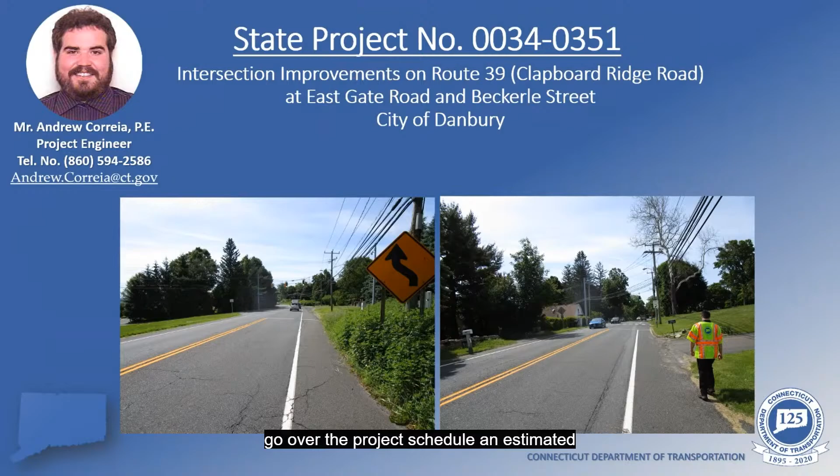Continuing on, we have a zoomed-in aerial of the approximate project location. To orient yourself in the slide, north is the top, south is the bottom, and west and east are left and right respectively.

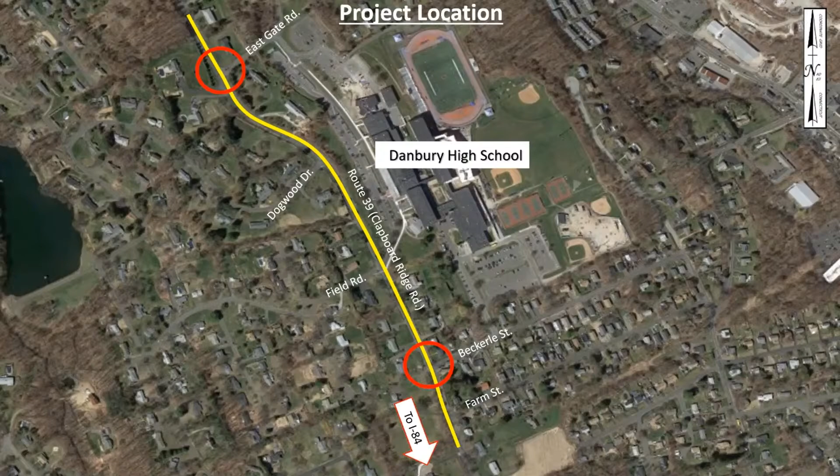The project itself is highlighted by the yellow line running down Route 39, with both of the intersections we're proposing improvements for highlighted in red circles: East Gate Road to the north and Beckerle Street to the south.

The total project length is about 3,700 feet, starting a little north of East Gate Road and continuing further south beyond Beckerle Street and even further south beyond Farm Street.

Route 39 is classified as a minor urban arterial, which means the road can accommodate local bus routes, lower speeds, and shorter trips for vehicles, lower vehicle volume, and provide access to residential areas that larger roadways in the area cannot. The posted speed limit for Route 39 is 35 miles an hour.

The project itself is located adjacent to Danbury High School, with both East Gate Road and Beckerle Street providing main access points to the northern and southern parking lots for the high school.

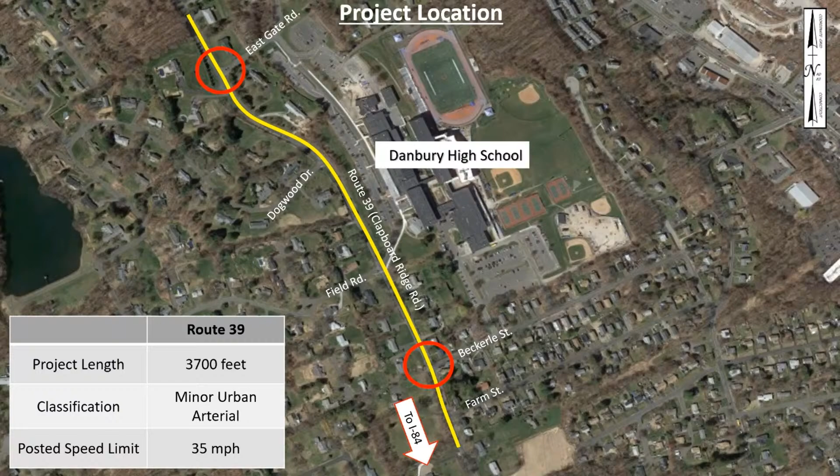Next, in these next few slides, I'll be showing a few pictures of existing conditions and going over what they can tell us about the intersections themselves.

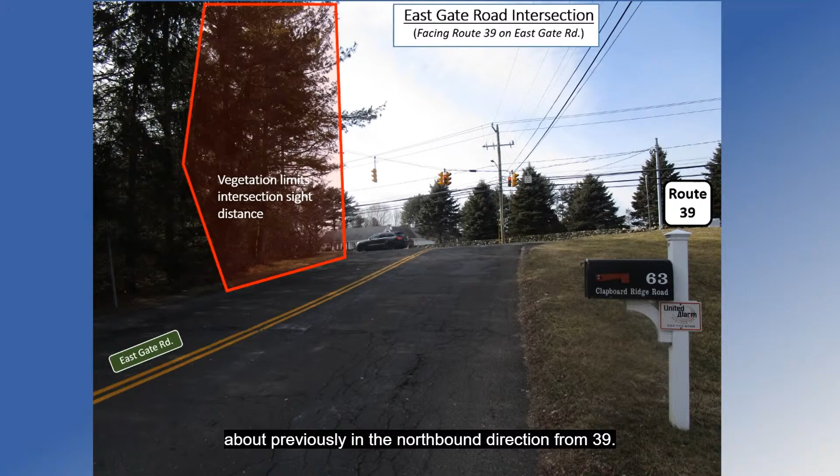Continuing on to another view of the intersection, we are now on East Gate Road looking up towards Route 39. As you can see towards the left hand of the intersection highlighted by the red shape, these are the trees I was talking about previously in the northbound direction of Route 39. As it is now, these trees inhibit the driver's ability, once coming up to the intersection, to look down Route 39 to make a safe right turn.

This is what we call a limit on the intersection sight distance, hence why there is a no turn on red for this intersection, as the driver must come to a full stop and travel on Route 39 must stop before they can safely turn right.

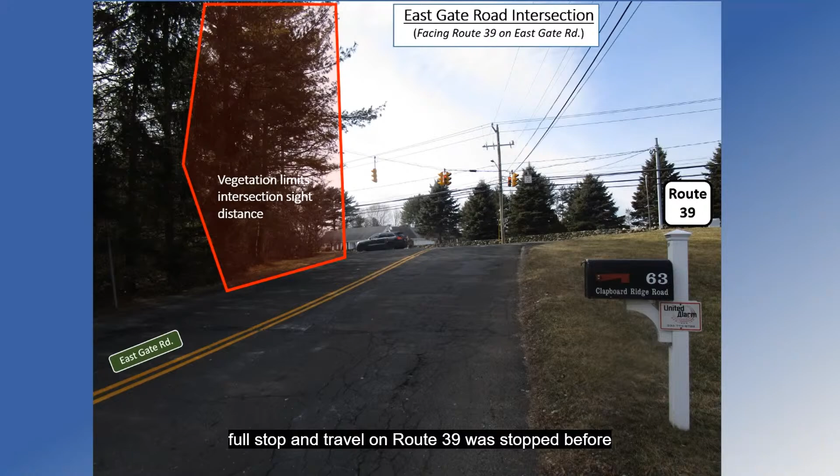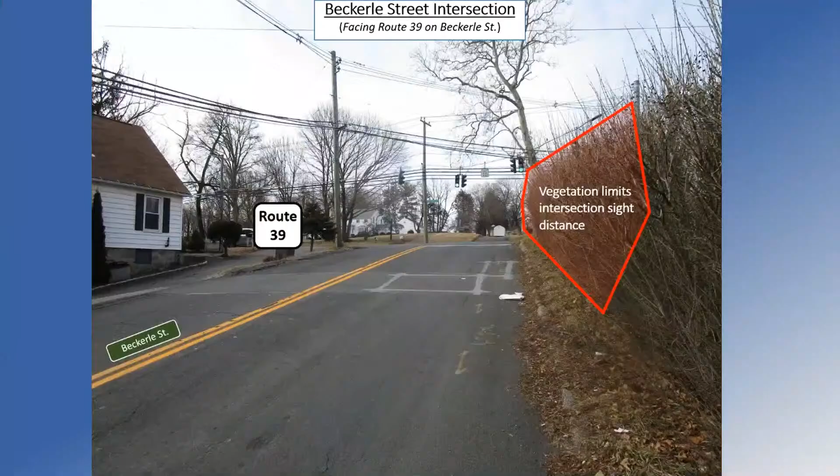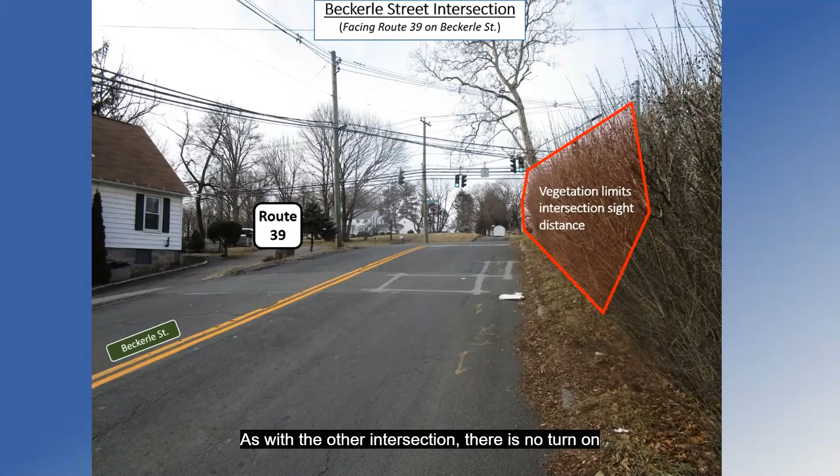Continuing on for this intersection, we are now on Beckerle Street, looking up towards Route 39. As with the other intersection, we have vegetation that limits the driver's ability to look up and down Route 39, as well as adjacent residential properties that make this roadway narrow. As with the other intersection, there is a no turn on red sign for this due to the narrowness of Route 39 and the limits placed on the driver to safely look before turning.

Moving on from the existing conditions on the intersections, I'm going to be explaining the project purpose and need, and also discussing the original project initiation.

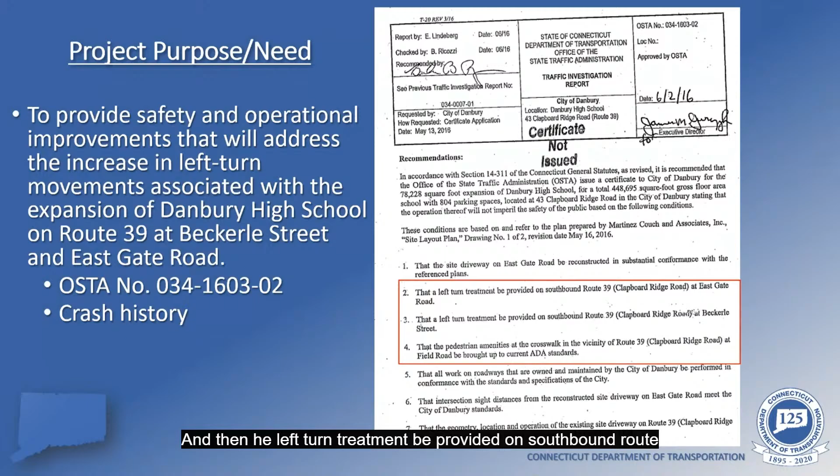Those are highlighted in red now, and they are that a left turn treatment be provided on southbound Route 39 at East Gate Road, and that a left turn treatment be provided on southbound Route 39 at Beckerle Street, and that the pedestrian amenities at the crosswalk in the vicinity of Route 39 at Field Road be brought up to current ADA standards. So this was originally why the project was initiated.

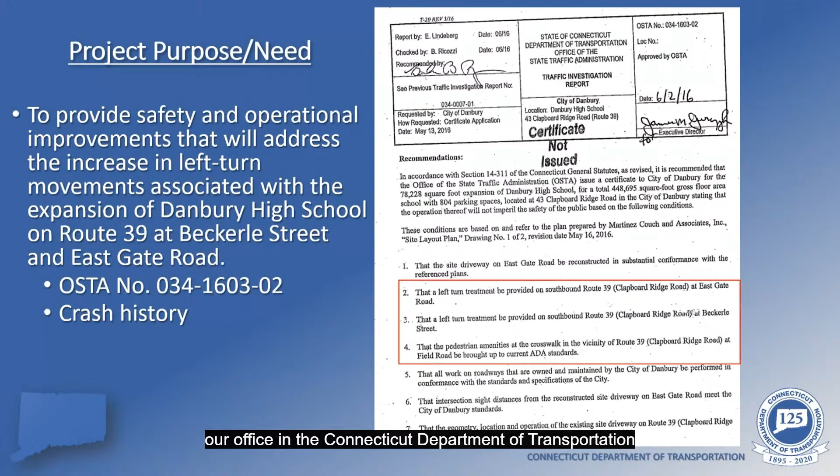Now, from there, when it came to our office in the Connecticut Department of Transportation, we looked into it a little more. Beyond this, we looked at crash history, we looked at existing conditions, as you saw in the pictures before. So we finally came upon this project purpose, which is not only to fulfill the conditions in this traffic investigation report, but was also to provide safety and operational improvements that will address the increase in left turn movements associated with the expansion of Danbury High School on Route 39 at Beckerle Street and East Gate Road.

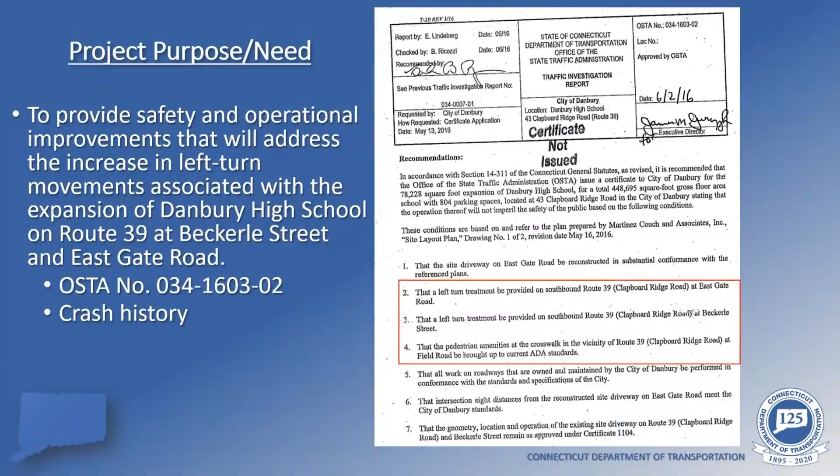As I mentioned in the previous slide, we analyzed crash histories while investigating project purpose and need. To do this, we create crash diagrams over time frames by utilizing police reports for a given area.

What you see in front of you is the crash diagram for Route 39 and East Gate Road for the time frame of January 2015 to December 2019.

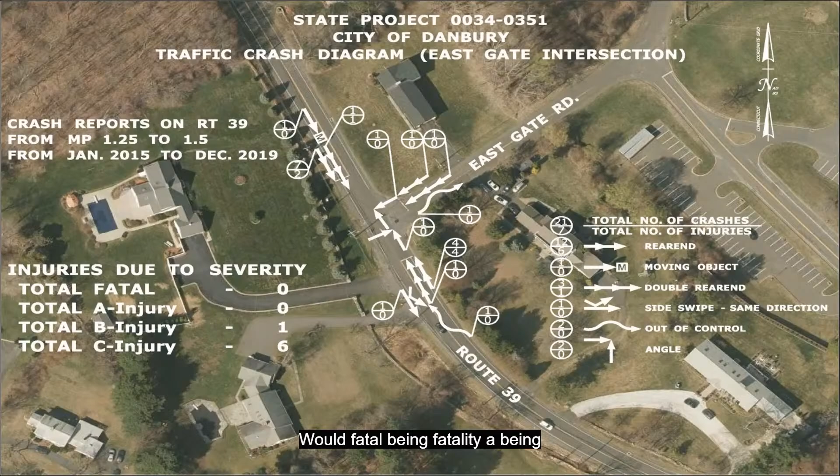North is the top of the slide, south is the bottom, and west and east are left and right respectively. On the left side, you'll see injuries by severity, a breakdown given the time frame, with fatal being a fatality, A being a major injury, B being a minor injury, and C being cuts and bruises. On the right hand side, you can see a breakdown of the total number of crashes based on the type of crash, and the breakdown of total number of injuries based on the type of crash.

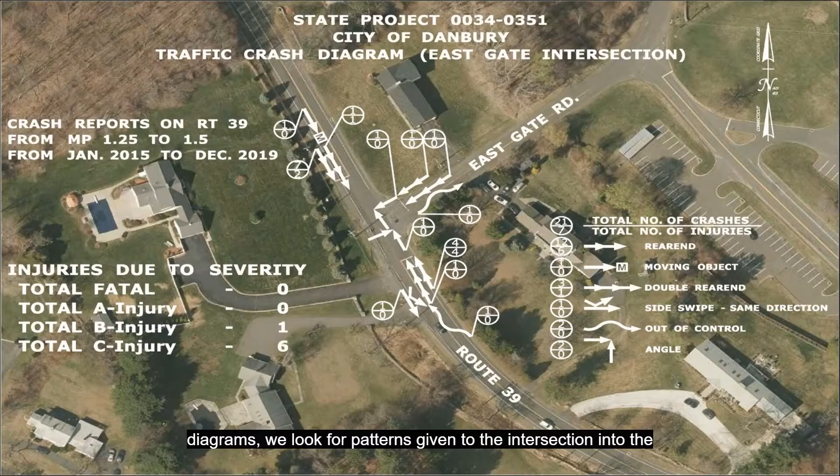Now for this intersection, there was a total of 21 crashes and 7 injuries over the time frame. While analyzing these crash diagrams, we look for patterns given to the intersection and the roadway to see what we need to do to improve.

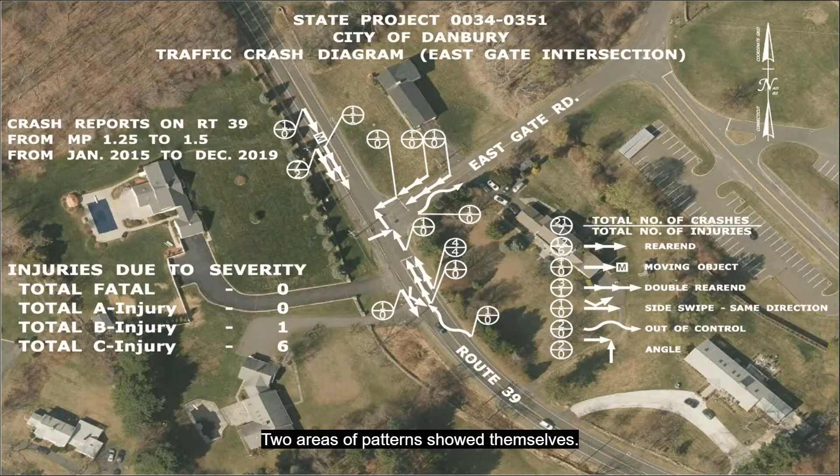For this intersection, two areas of patterns showed themselves, now highlighted by the yellow circles. The larger yellow circle is southbound travel coming into the intersection. Rear ends and multiple rear ends seen here are most likely due to a timing issue with the left turns and bypassing traffic coming through. On the northbound direction in the smaller circle, these rear ends and multiple rear ends kind of skewed themselves and were a little too much for what was given of the volumes coming in and out of the intersection.

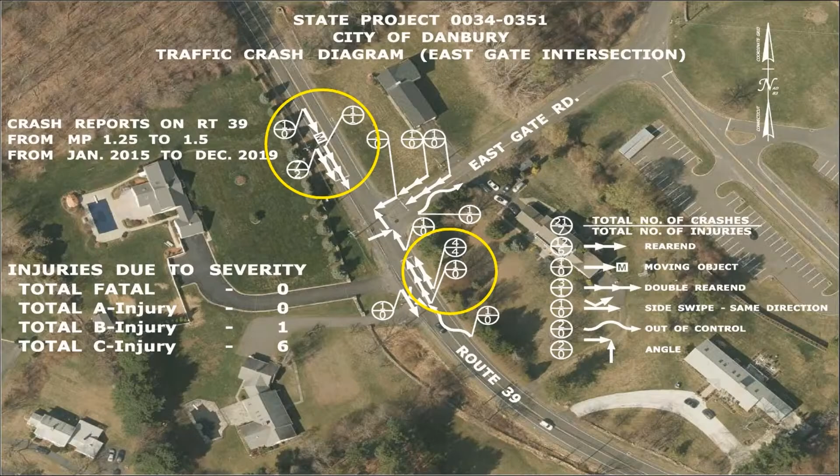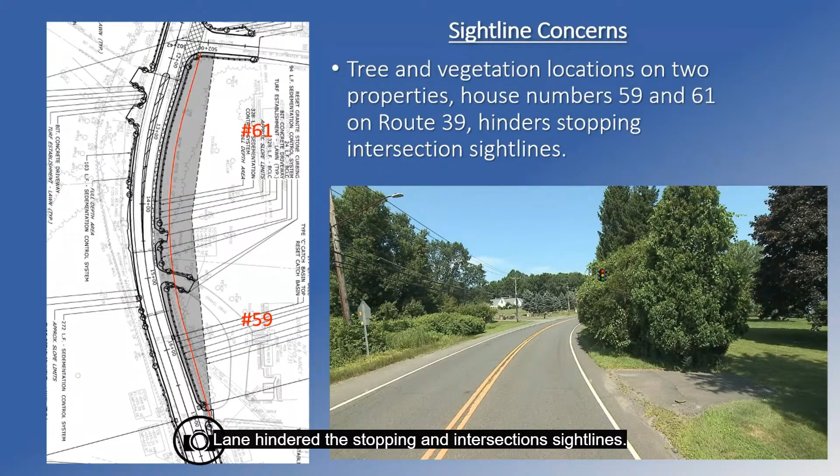Seeing this odd pattern of crashes in the northbound direction caused for further investigation. Once out in the field and examining existing conditions, we were able to conclude that tree and vegetation immediately adjacent to the northbound travel lane hindered the stopping and intersection sightlines. As you can see highlighted in red in the bottom picture, this vegetation hinders a driver's ability to see the upcoming traffic signal.

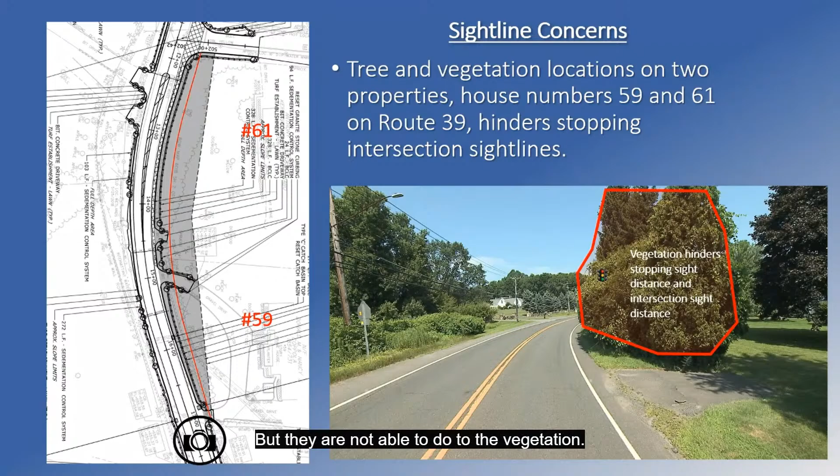Looking at the left-hand picture, the camera is where this photo was taken from. The driver should be able to see the signal, but they're not able to due to the vegetation.

To show what I mean by a driver's perspective coming into the intersection being hindered by the trees and vegetation, there's a short video clip in this slide. This is a car driving at the posted speed limit coming up to the intersection.

Now, as the driver is coming up to the intersection, the driver's perspective does not expect a traffic signal to come out so quick from the inside of the curve. I'll show the video again to exemplify this.

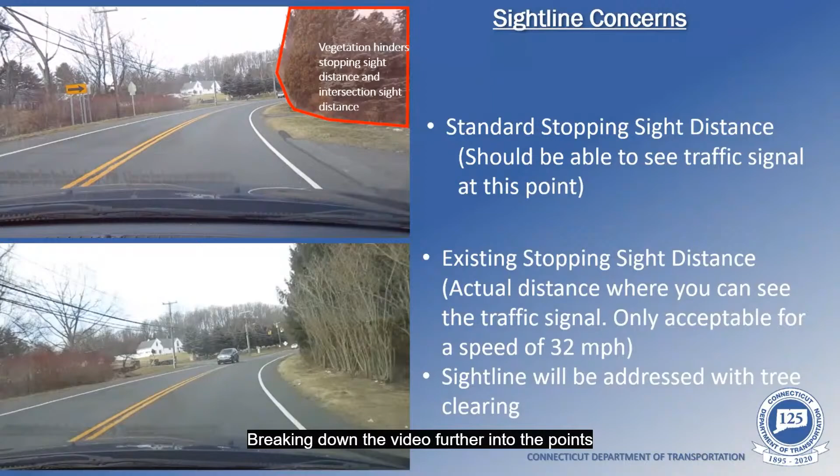Breaking down the video further into the points of where stopping sight distance is needed, the top picture shows the position of a car where the standard stopping sight distance should be. As you can see, as a driver, you cannot see the traffic signal head due to the vegetation highlighted in red. On the bottom picture, it shows the actual point when a driver can see the signal head. This is actually only good for a speed of 32 miles an hour.

We will be addressing this with proposed tree clearing to alleviate the issue.

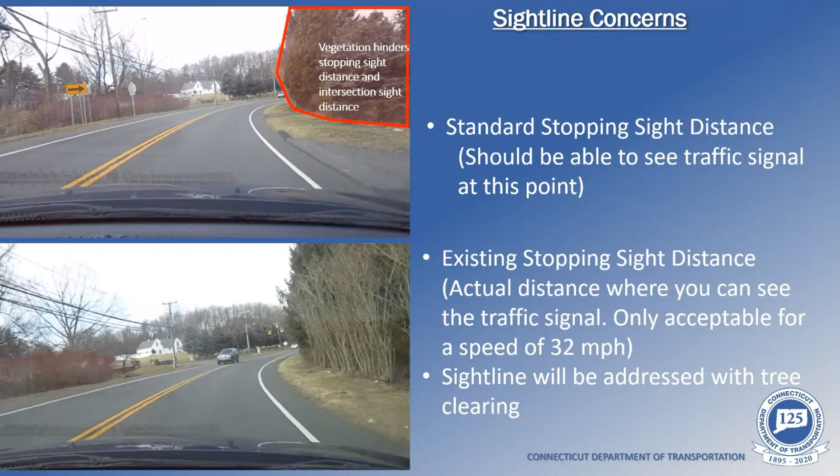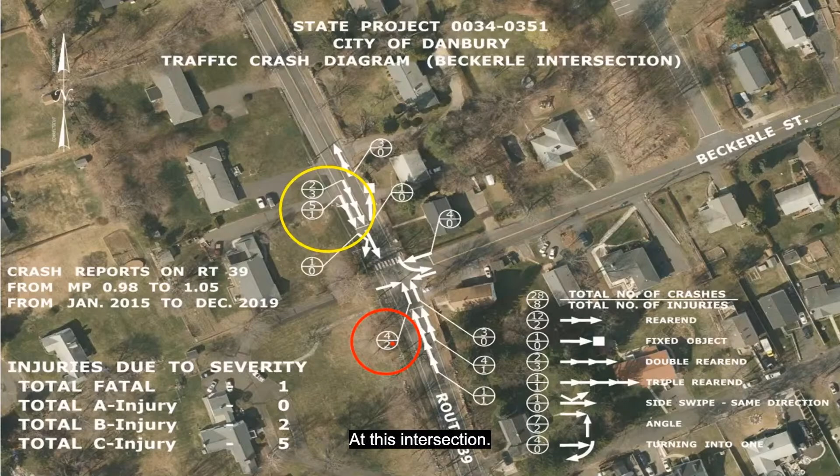One large difference between the two intersections was there was a fatality at this intersection. This fatality was due to, as you can see in this diagram provided by the police report, a left turn vehicle, vehicle 2, turning left onto Beckerle Street, having a collision with vehicle 1 traveling in the northbound direction on Route 39.

Now, we propose some safety improvements for both of these intersections, and I'll be handing off the presentation to Richard Franklin, who will go over what we plan to accomplish.

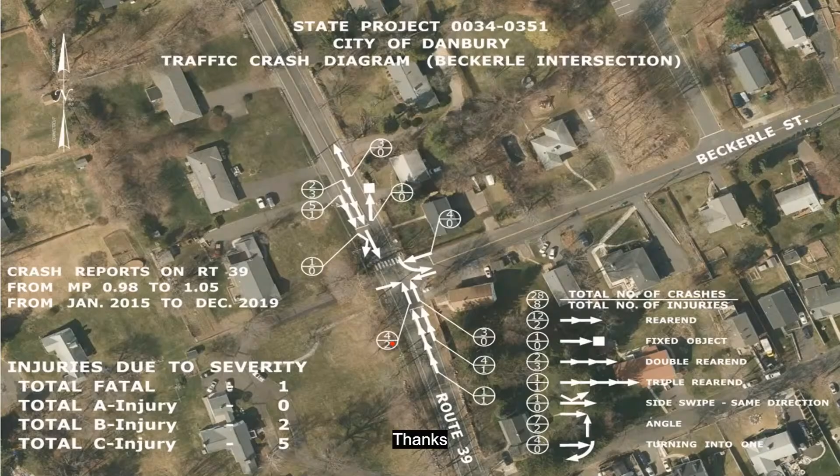I'd like to reiterate that our design is at the 30% design phase, meaning we are 30% of the way towards final design. Due to this, the project design is subject to change between now and final design.

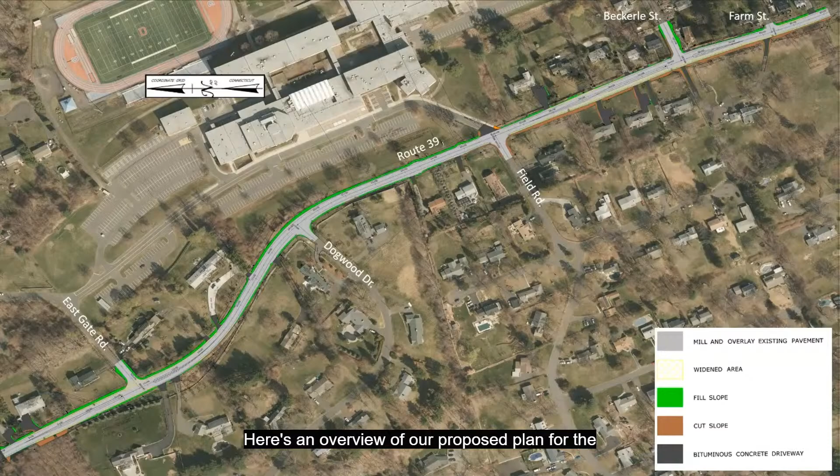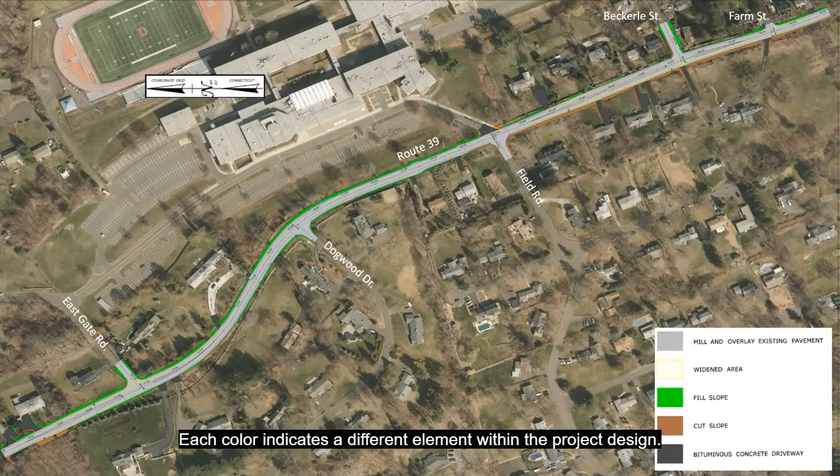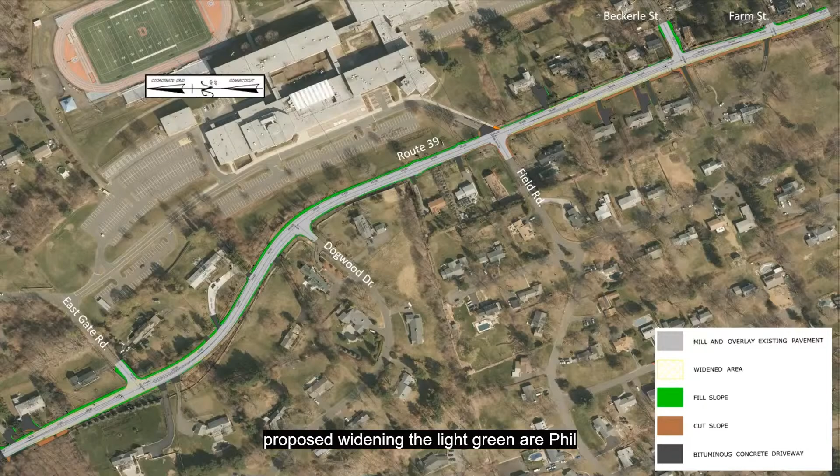Here's an overview of our proposed plan for the project. We'll take a closer look at each section a little later. This is what we call a color plan. Each color indicates a different element within the project design. The light gray is the roadway, the yellow hatch is proposed widening, the light green are fill slopes, the brown are cut slopes, and the dark gray are driveways.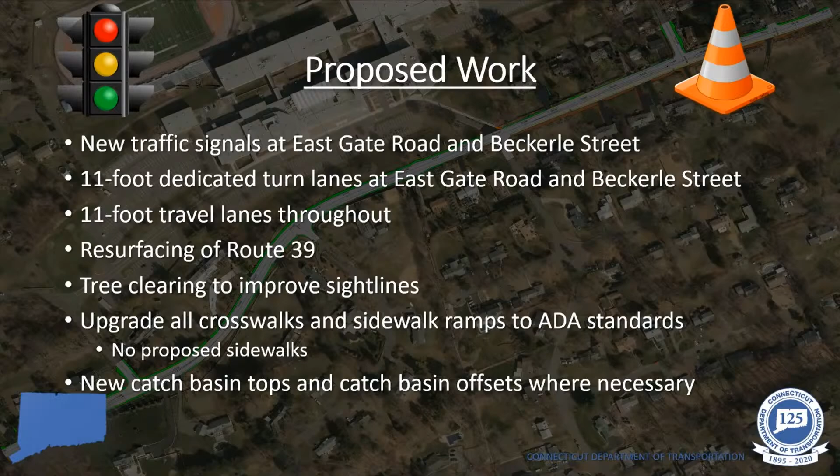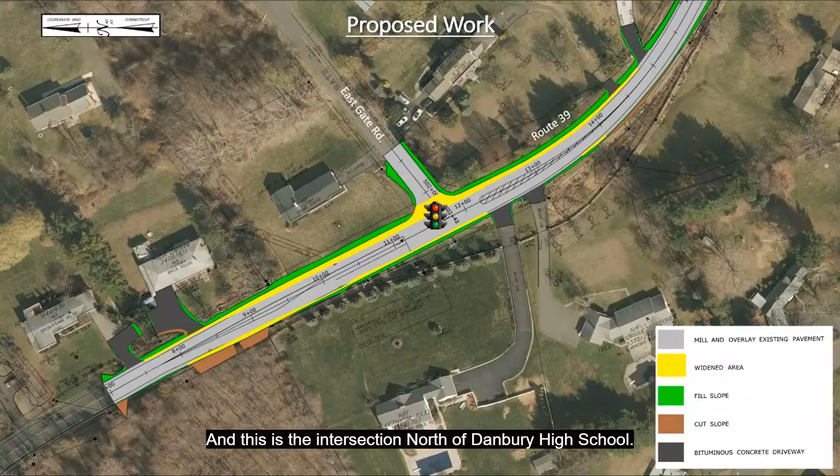Here we have our color plan once again, this time focused on the East Gate Road intersection portion of the project, north of Danbury High School. The main change we're proposing is the introduction of a dedicated left turn lane. We're also proposing new traffic signals to bring this intersection up to date and accommodate our new intersection layout. Along with the traffic signal, new pedestrian amenities are being proposed that meet Americans with Disabilities Act standards, which I'll refer to as ADA for short.

Notice the yellow shaded region. This is where we're proposing widening and full-depth roadway reconstruction to fit the new turn lane. There will be about 4 to 5 feet of widening on the northbound side and about a foot of widening on the southbound side. There's less widening proposed on the southbound side to avoid impacting a large stone wall. There will also be some driveway reconstruction in the area to bring these driveways up to state standards.

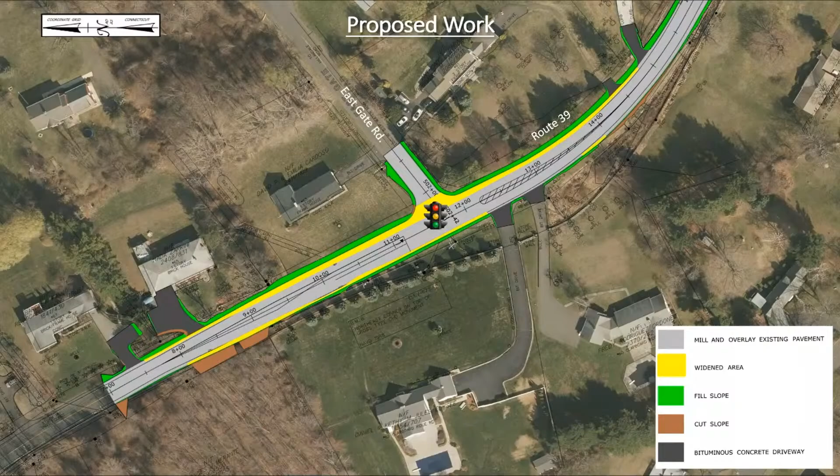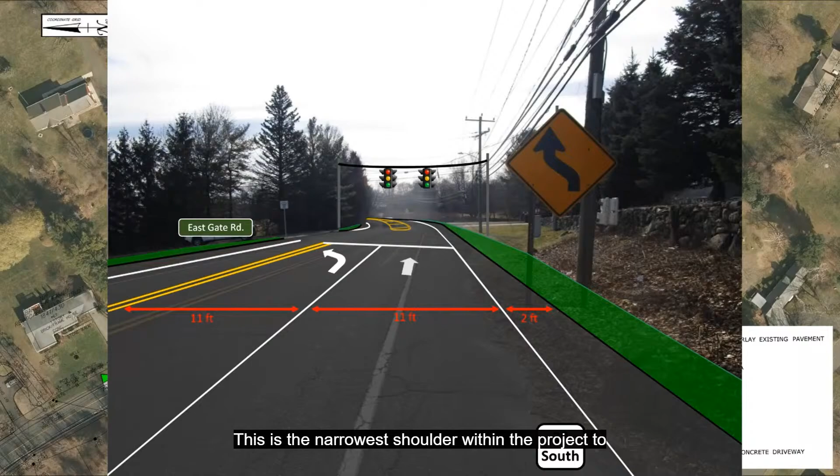Here's a rendering of what the intersection might look like when construction is completed. Notice the 11-foot turn lane and travel lane with a 2-foot shoulder. This is the narrowest shoulder within the project, to avoid impacting that wall to the right which I mentioned previously. The standard shoulder width within the project is at least 4 feet.

It's important to add that these left turn lanes improve the safety of the intersection by giving users a protected left turn phase. This is intended to avoid possible crash scenarios like the one Andrew Correa previously presented about, which resulted in a fatal injury. Andrew also showed evidence of drivers traveling off the right side of the roadway to pass vehicles waiting to turn left. Having a dedicated turn lane and travel lane will mitigate that issue as well.

Now we'll take a closer look at the Beckerle Street intersection portion of this project. It's very similar in design to the East Gate Road intersection and introduces a new dedicated left turn lane. Again, we're proposing new traffic signals and pedestrian amenities. At this intersection, the majority of the widening is being proposed on the southbound side. This is due to limited state-owned property on the northbound side, and there are several stone walls adjacent to the roadway which we want to avoid impacting.

The widening on the southbound side ranges from about 5 to 7 feet. At this intersection, you can see there's a significant brown shaded region on the southbound side, which is a cut slope. This is when we'll be cutting into the slope to provide smooth grading on the properties being affected by the roadway widening. Note that the cut slopes are indicated in brown, but all properties affected by this project will be receiving new grass.

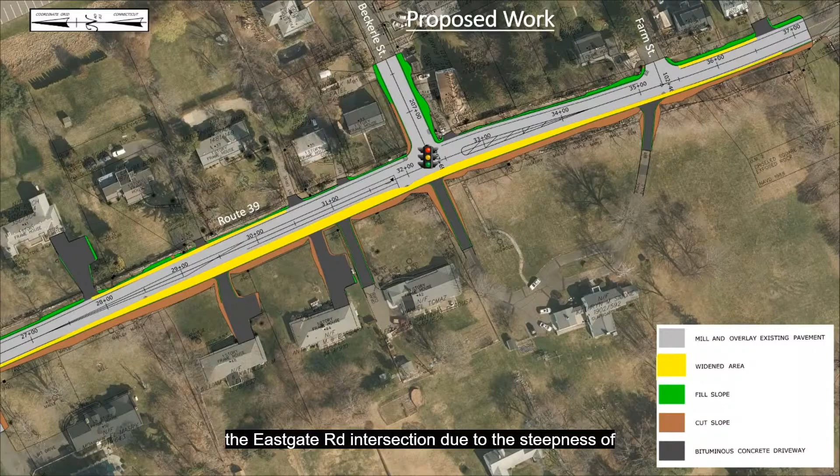The properties adjacent to the roadway here are steep, so we'll have to do a little more work to provide that smooth grading I mentioned. There will also be more driveway work in this area than at the East Gate Road intersection, due to the steepness of the driveways. This is because we want to provide driveways that do not exceed the maximum grade recommended by the state.

Here's a rendering of what the intersection might look like once completed. Notice the 11-foot turn lanes and travel lanes with the standard 4-foot shoulder. You can see the brown cut slope again, but as a reminder, grass will be provided on every property that is affected.

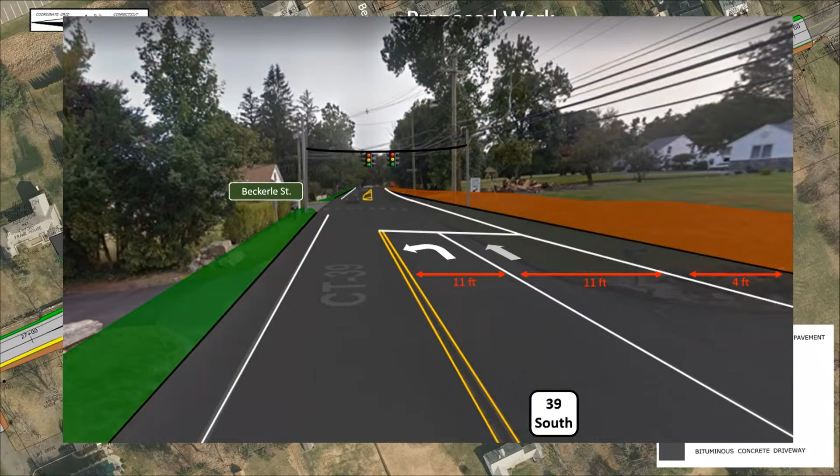As mentioned previously in this presentation, one of the requirements from the OSTA agreement with the City of Danbury was to upgrade the pedestrian amenities along Route 39 at Field Road to meet ADA standards. In these pictures, you can see the existing sidewalk ramp and crosswalk at the front of Danbury High School across from Field Road. Our proposed design replaces this ramp with an ADA compliant ramp like the one on the drawing in the lower right side of your screen. A new crosswalk will be put into place as well.

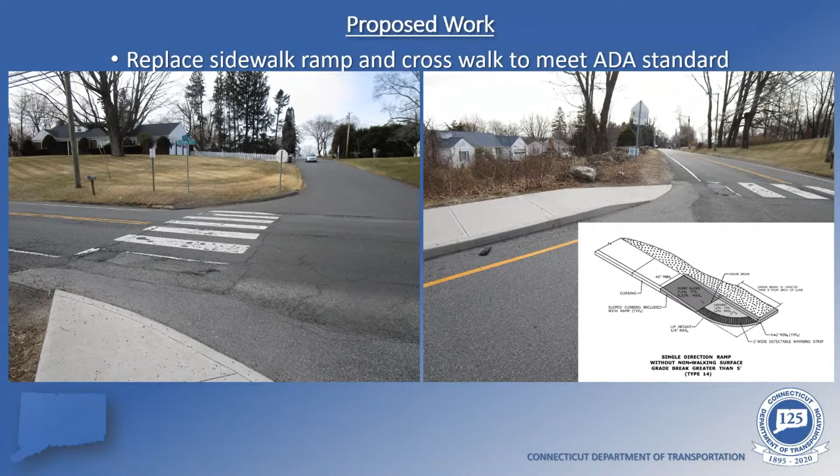And at this point, I would like to hand the presentation off to our rights-of-way coordinator, Jason Boyce, so he can explain a little bit about the rights-of-way process.

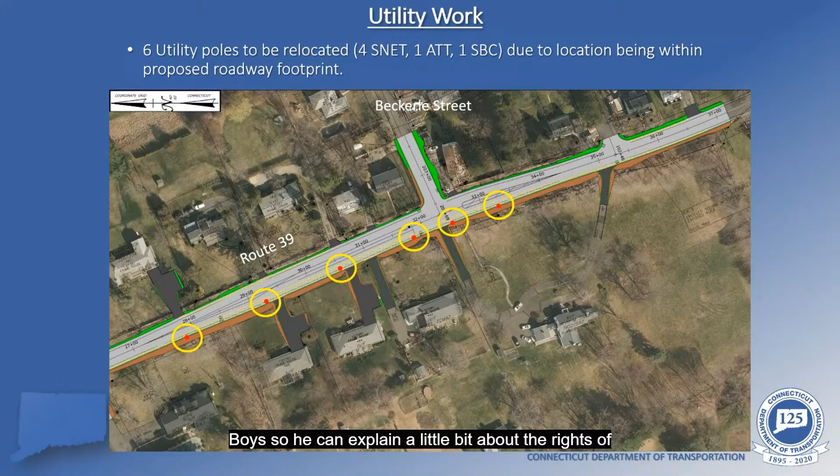Thanks, Rich. As Rich mentioned, my name is Jason Boice. I'm a project coordinator for the department's Division of Rights-of-Way. Rights-of-Way's purpose is to acquire all the property rights necessary for the project. All property rights will be acquired in accordance with Connecticut General Statutes Sections 13A73 and 13A98E and the Uniform Relocation Assistance and Real Properties Acquisition Act of 1970 as amended.

Anticipated property impacts on this project consist of sightline easements and slope easements. Now, of course, those are subject to change as the design progresses.

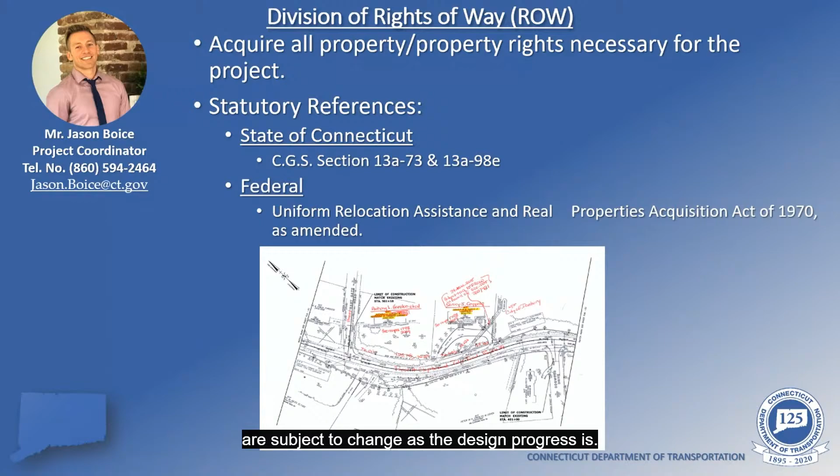So, the right-of-way acquisition process. First, each property owner will receive a letter of intent to acquire. This kicks off the right-of-way process and is often the property owner's first involvement with the right-of-way office. From there, valuation will occur. The department determines the fair market value of the impacts to the property to establish an offer of just compensation. Once valuation is complete, an offer letter will be drafted. The owner will receive a written offer letter from the department based on that valuation.

And that's when negotiations will occur. The owner is given a reasonable amount of time to consider the state's offer and enter into negotiations. At the completion of negotiations, an acquisition will occur. An acquisition can occur in one of two ways. One, an agreement can be reached and then an abbreviated real estate closing will occur. The state prepares all the documentation and pays all the recording costs associated with the closing. If negotiations reach an impasse, the Commissioner of Transportation has the authority to acquire property rights through eminent domain.

Now, eminent domain does not preclude the owner from continuing negotiations with the state. Owners are still entitled to the state's offer, the funds are deposited into the court, and the owner can petition for withdrawal at any time. Once funds are deposited into the court, they are out of control of the DOT, and depending on the encumbrances associated with the property, the withdrawal process can take some time. Now, the owner has 6 months from the date of condemnation to file an appeal with the court if continued negotiations cannot reach an agreement.

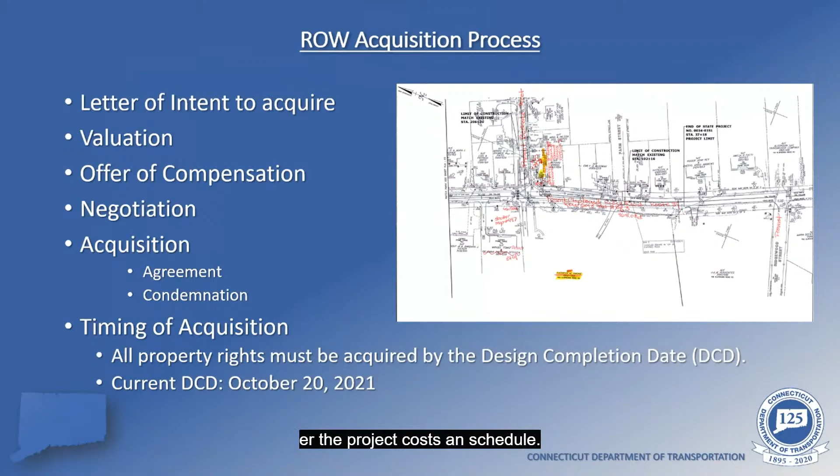Thanks, Jason. To finish off our formal presentation, I'm going to cover project cost and schedule. We are looking at a total construction cost of about $4.1 million, with 80% being covered by federal funds and 20% being covered by state funds. And we are looking to begin construction in the spring of 2022.

And with that, I would like to thank you all for listening to our presentation, and I'm going to hand it off to our project manager, Michael Chirpek, to begin the live question and answer portion of our public info meeting.

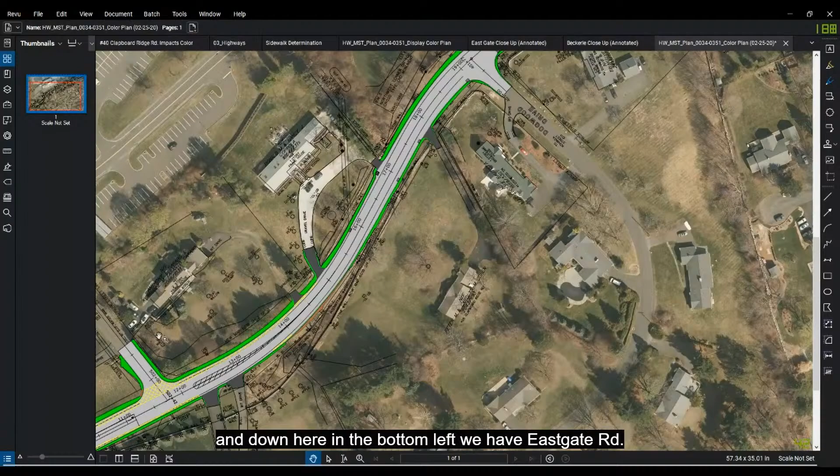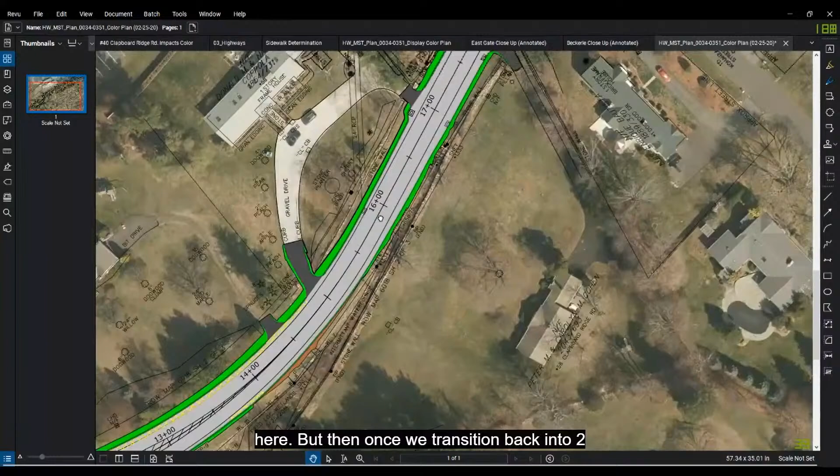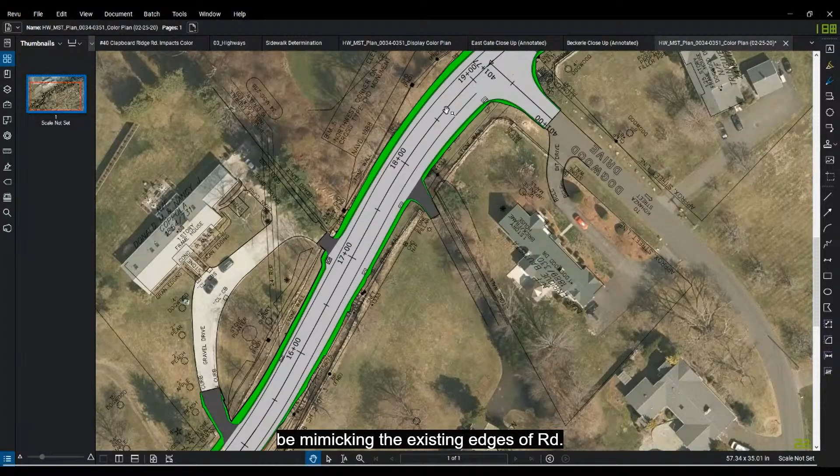Here at the top of the screen we have Dogwood Drive, and in the bottom left we have East Gate Road. As you can see by this yellow hashed area on the northbound and southbound sides, we have a little bit of widening up until these parts here. But once we transition back into two lanes along Route 39, we're looking to match existing conditions as much as possible, mimicking the existing edges of road, with maybe some slight grading on the southbound side. Beyond that, there's not much being proposed in this area.

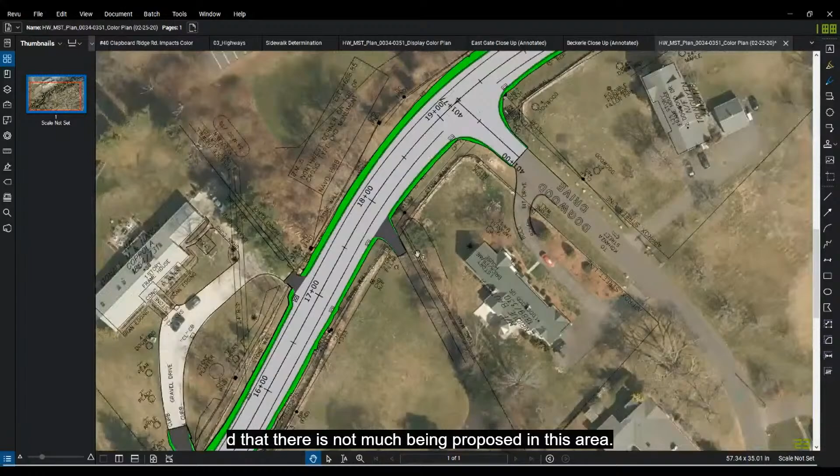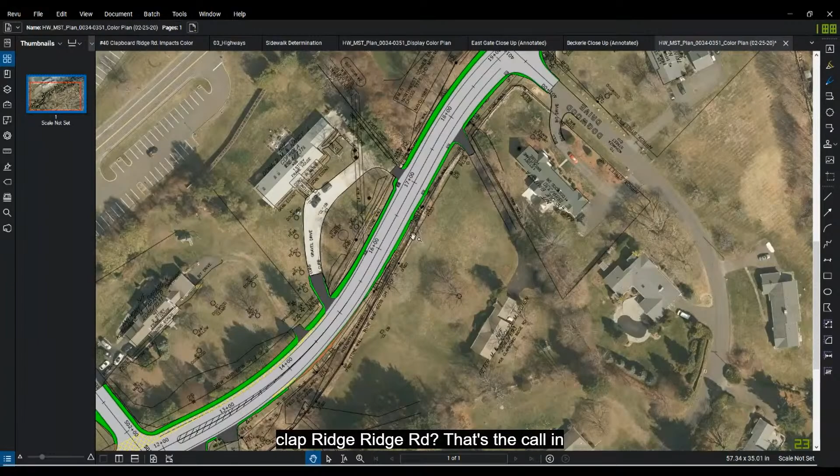Thanks, Rich. Rich, while you still have that up, would you mind going to 44 Clapboard Ridge Road? That's a call-in question. A resident at 44 Clapboard Ridge Road has septic in the front yard and wants to know how that's going to be handled. Sure, let me pull that up and see if I can provide a response.

So 44 is this house right here. To provide a response, from what I'm seeing here, and we can verify this with a cross section in the design plans, we do not expect to be doing any work on the private property except for regrading the existing driveway. The widening happening on the roadway has impacts to the front yard, albeit state right of way, so it would be unlikely that the septic is within the state right of way there. But we could verify that if it were a major concern, though I don't believe that it is.

But we are repaving and regrading the entire driveway, so we would probably pull an as-built showing where your septic system, the tank and leach field, is located - we could get that information from the town. If you know where it is, our guys could find it, but it doesn't look like it's going to be impacted. I still don't know exactly where it is, so it just doesn't look like it's going to be impacted, but we would verify that.

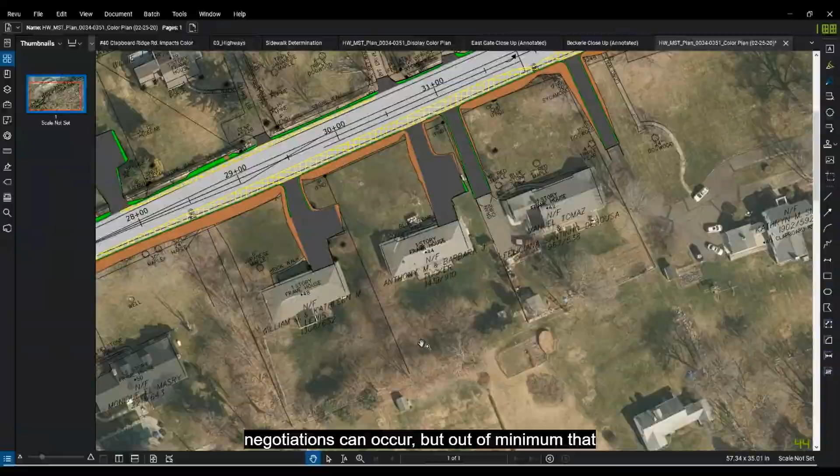Yeah, absolutely. So once a valuation occurs, it's considered a registered value, and that offer is made to the property owner. If they can't reach an agreement and the state does file for eminent domain, that valuation amount is deposited into the court and the property owner can withdraw it. Additional negotiations can occur, but at a minimum that valuation amount is deposited in the court for the property owner. If an agreement can't be reached, the property owner has 6 months to file an appeal, and at that point an argument can be made in front of the judge for additional compensation.

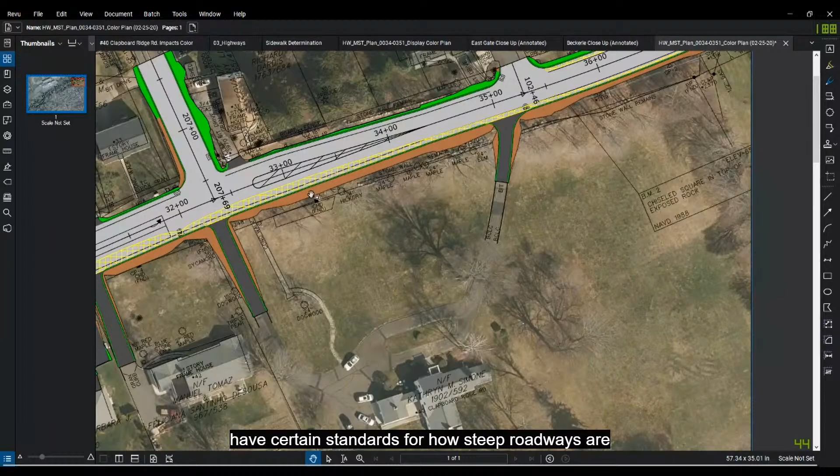Rich, would you go over some of the property impacts and the work we're proposing? Sure. As explained on our color plan, this yellow hatched region is where we are proposing our widening. This whole region currently is not roadway, but we will be expanding it to introduce this new turn lane. Because of this, we need to do some regrading in front of the property, indicated in the brown shaded region. All the regrading will have grass replaced; the brown just indicates cut slope. The grading is necessary because we have certain standards for how steep roadways or side slopes are allowed to be right off the roadway.

Following those standards leads to the extent of the grading here. Additionally, since we're widening, we'll need to do similar regrading on the driveways so they don't exceed state standards for how steep a driveway can be. But aside from the driveway work, all of the grading being done is within state right-of-way. That's pretty much the extent of what's going on here.

Hey Rich, can you zoom in just a little bit? Sure, what in particular? Zoom into the work being proposed along the edge of road. Yeah, we got a comment that it was hard to see. Okay, all right, sure.

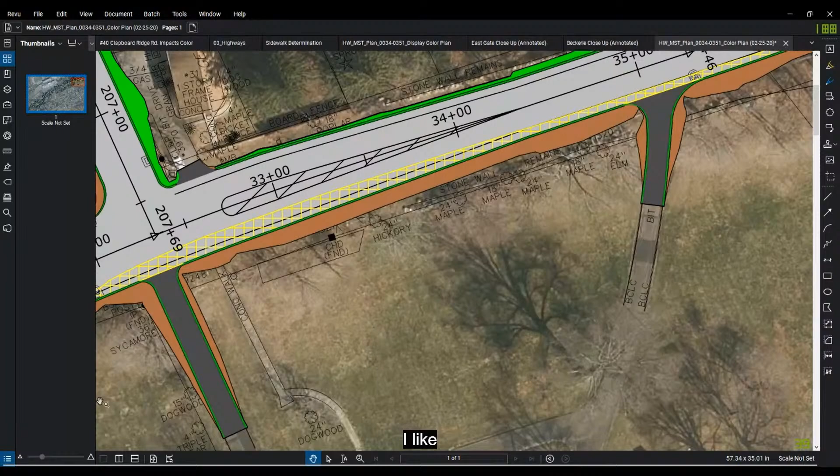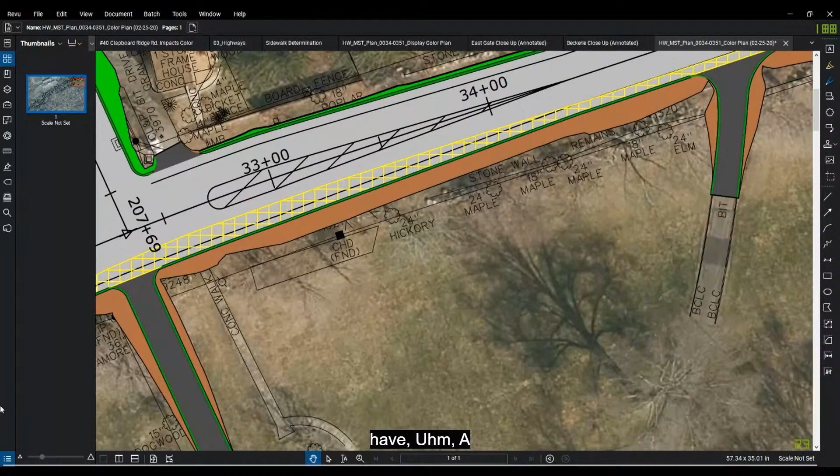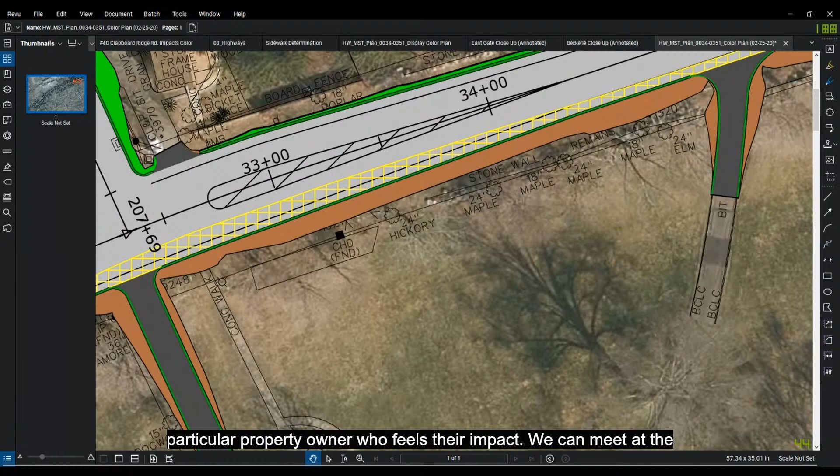As we mentioned earlier, we'd be happy to have a conversation after the meeting, tomorrow or the next day, about anything you see here—if there's anything concerning, if the video format wasn't good, if the sound quality wasn't good. This is one of the first meetings we've done in this format, so I appreciate everybody bearing with us. We like to be in a room and have that conversation with affected property owners to really explain the impacts. It's hard to tell in a plan view, we understand. So we could even meet outside with any property owner who feels impacted, meet at the property, and describe what's being done, maybe better in the field. We're willing to do that as well.

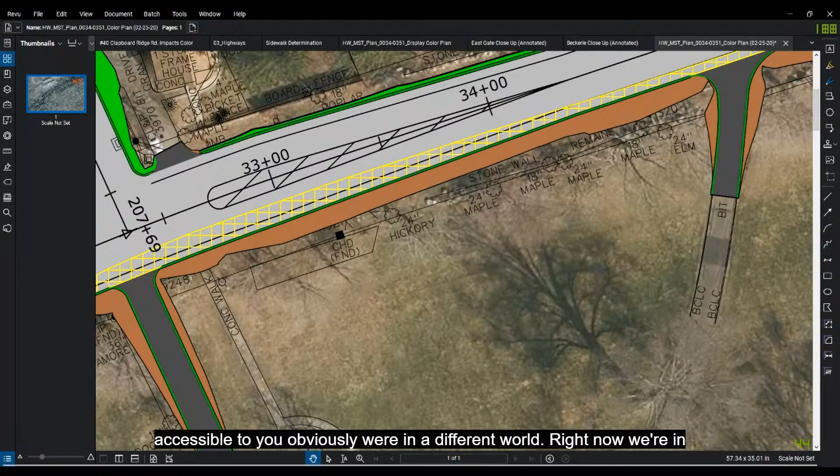We got a comment asking how to repeat access to the YouTube recording of the meeting. The same way you accessed the meeting tonight, through the project webpage, the YouTube link will be posted there after the meeting, as will a link to the demographic survey pertaining to tonight's meeting, how we did for outreach and to meet your needs. Typically we ask, was the building accessible to you? Obviously we're in a different, virtual world right now doing a virtual meeting, and we'd like feedback on that too. So it's the project webpage.

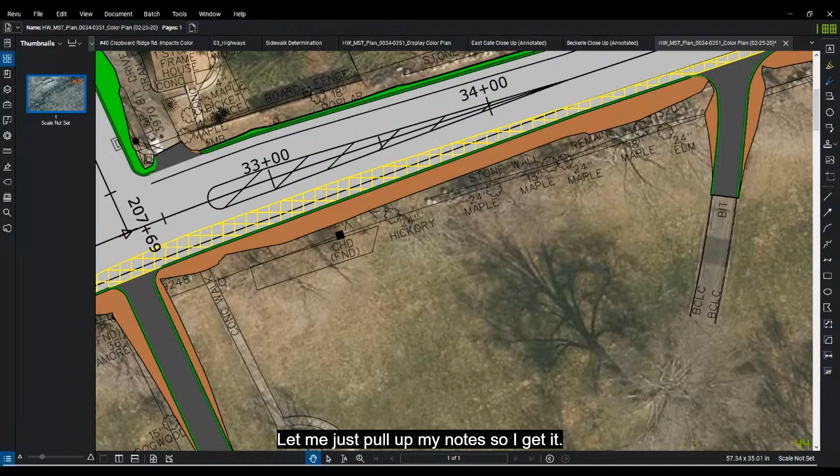Let me pull up my notes so I get it right. I can spell it out for you. The project webpage: http://portal.ct.gov/DOT Danbury 34-351. That's portal.ct.gov/DOT Danbury 34-351. So the same way you got to the meeting tonight, you should be able to get to the YouTube recording.

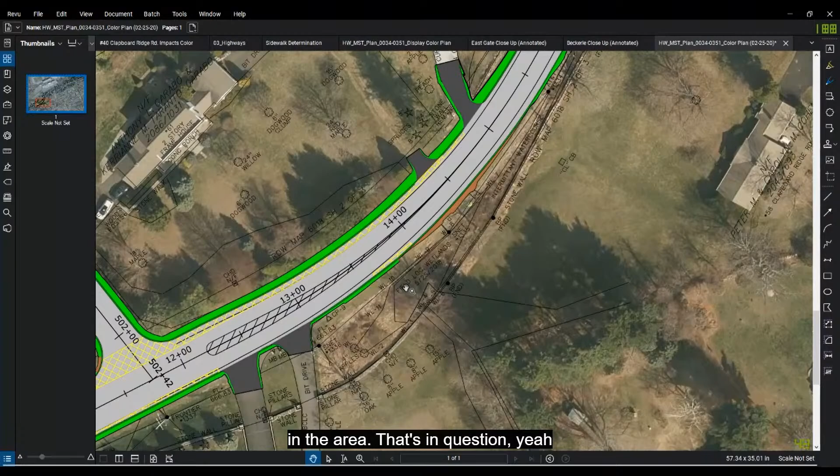Sure. Rich, you want to try to zoom in as close as you can and show that yellow hatch that's kind of tough to see in the area in question? Yeah, sure. First, I'll zoom out for a second so you can see, here's East Gate Road, over to the left of my screen.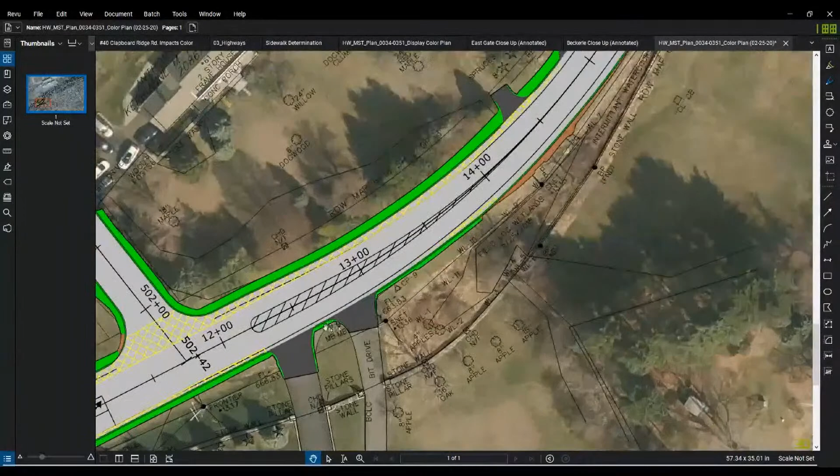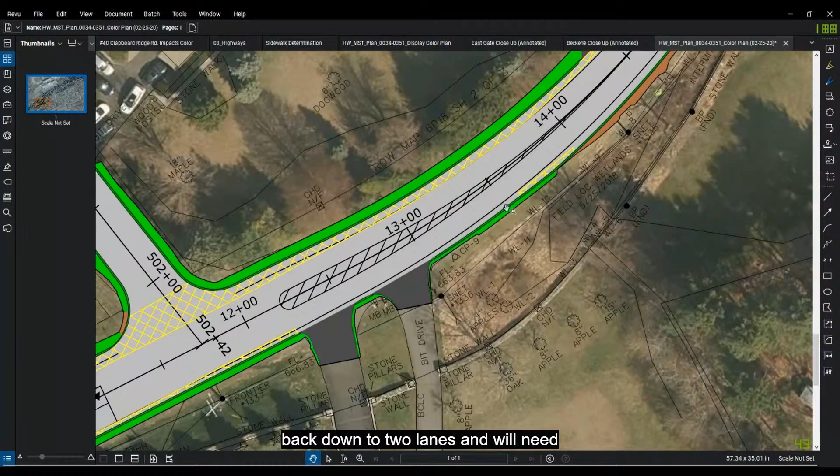And when we said 1 foot widening, it's about 1 foot, not exactly 1 foot all the way through. But at the intersection, we have this little sliver of widening coming through. After the intersection, we begin transitioning back down to 2 lanes, and we'll need another little sliver of widening to make that happen. This is where the widening ends as far as the East Gate Road portion of the project is concerned.

After this point, there's no more widening until we get to the Beckerle Street intersection. Thanks, Rich, I hope that answered the question.